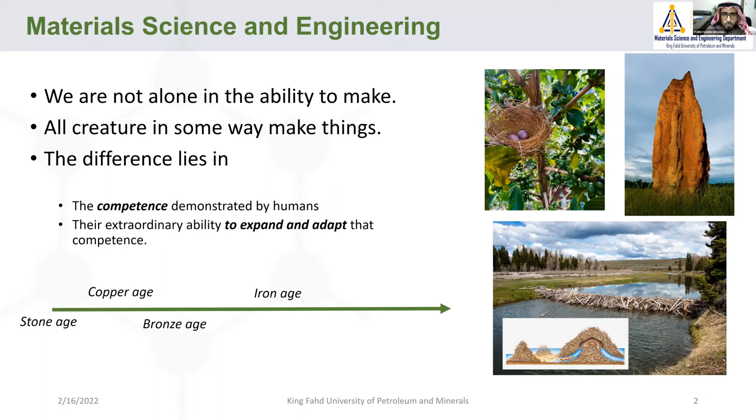And this is very important. With the advance of technology and the complexity of the technology we rely on today in our life, we have to see the holistic view when it comes to materials. We have natural resources, and those natural resources let us have a material that can be used for certain applications. So it's very important to know what different types of material exist, and then what is the problem we have, and then we want to use that material for that application.

And then after we use that material for that application and the material is already in use, then what kind of issues can that material show? How will the material behave in that application, whether it comes to failure or degradation? And then a very important question: what will we do at the end of the material's life?

Because you have high competition when it comes to material, nature cannot continue providing that kind of material. So can we recycle the material again and feed the same industry, or maybe a new industry? Think about lead acid batteries and what's going to happen to them as electrical vehicle motors become something we will see every day on the road instead of other types of cars.

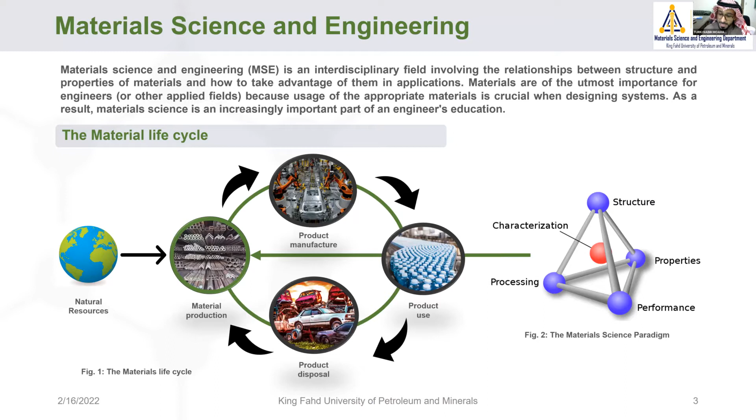So having this full picture, and having people who see this full picture and are able not only to design and understand the property and structure of materials, but also to use it for certain applications to address grand challenges—whether it comes to water, energy, or the environment that we are harming today through carbon emissions, or through recycling or the waste that we are dumping into the land. So there are many issues, and materials are always there to fix these issues.

Now, because the problem is not on a small scale, if you look at the value chain, it's not about bringing material for a certain problem or certain technology, but about developing and providing talents to the job market—people who are able to continue that effort of designing, providing, and synthesizing materials that will help in different applications.

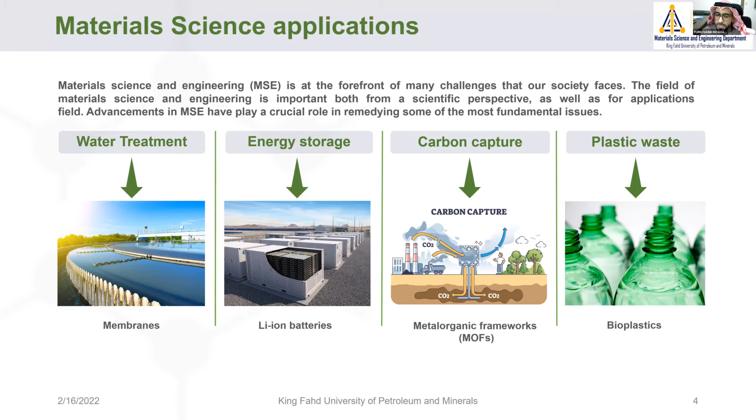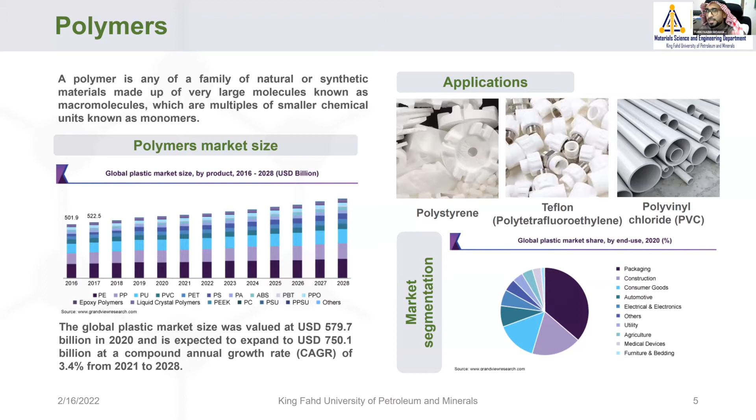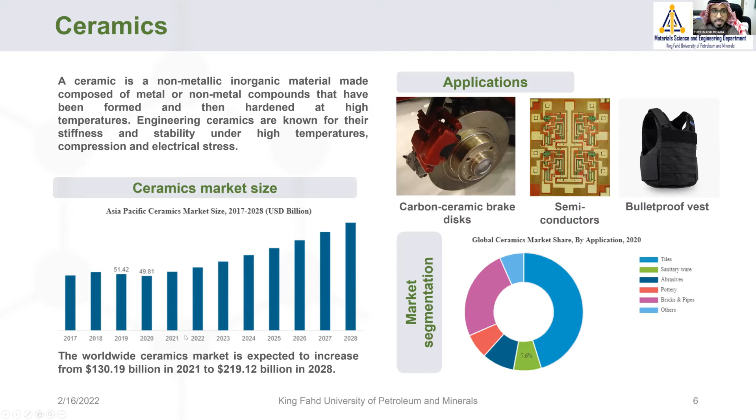This is why here at KFUPM we felt it's very important. Before that—different types of polymers, we see there is a big demand for them, regardless of what kind of plastic you're dealing with, with many applications in packaging and construction. Now if you look at ceramics, the same thing: a wide range of applications, and the global demand is also increasing. The same is true for composite materials, the topic today—you see an increase in the demand for composite material for different types of applications.

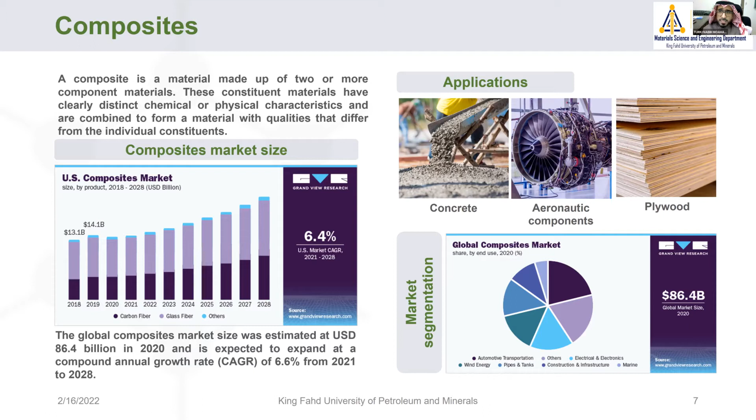This is why here at KFUPM we said it's very important that we go ahead and start something completely dedicated to material science and engineering. So in April 2021, KFUPM decided to establish the Material Science and Engineering Department. Now, this is not something unique, but what's unique is that along with the graduate program we have, we are for the first time—and this is actually the only program here in the region—providing and offering a bachelor's degree in Material Science and Engineering.

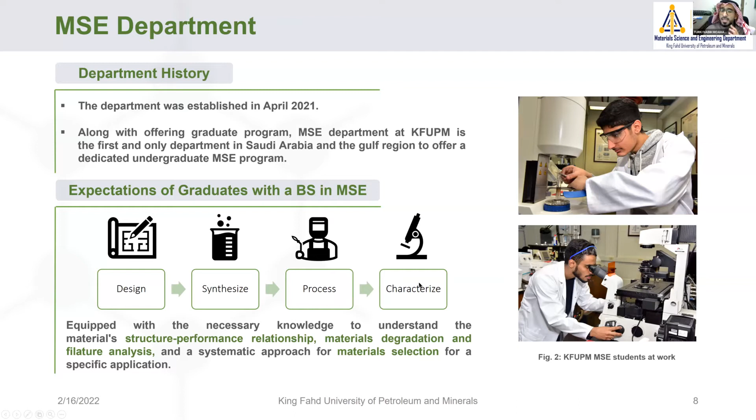So it's very important, if there is a take-home message from my talk today, that we are here trying to provide for the future jobs and for the market, for the business needs of different industries, people who are experts and ready to impact the journey when it comes to materials. So what we're expecting from our students, and what we're trying to do, is prepare students to be able to design, synthesize, process, and characterize different types of materials.

So in the first year, the student will know different types of materials, whether ceramics, metal, or composite type materials, and then thermodynamics—what encourages certain materials to behave in a certain way. So he's going to learn more about Gibbs free energy and other governing equations. And then structure, very important, and defects. The student will look at defects not as an issue, but also as an opportunity for a wide range of applications. And then diffusion and kinetics, and materials characterization.

So the student will be aware, will be introduced to a wide range of characterizing materials, such as XRD, SEM, UV-Vis, XPS - different ways of characterizing the materials.

Ending the first year, now we take the student and tell him, now we're going to give you a dedicated course in each type of material, each main class of material. So in the first year, you know about different types of materials and their structure, how to characterize them. And now in the second year, he will learn about the property-structure relationship for each main class of material.

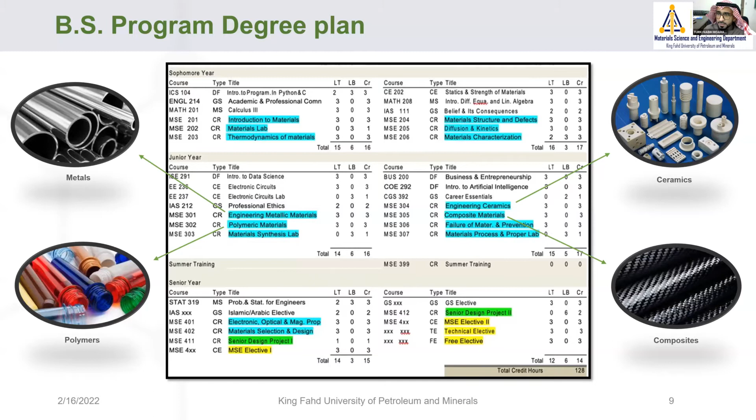And then in the final year, more dedicated courses on electronic and optical properties and material selection. And then you see here 4 elective courses, and those 4 elective courses we want to give an edge to our students before they start their next chapter in their life.

And this, as of now, we have 5 important areas: computational material design, metallurgy and mining - anyway, mining is very important for the country, that's considered to be the 3rd pillar for the economy of Saudi Arabia - materials for water and energy, corrosion and degradation, and also non-metallic material.

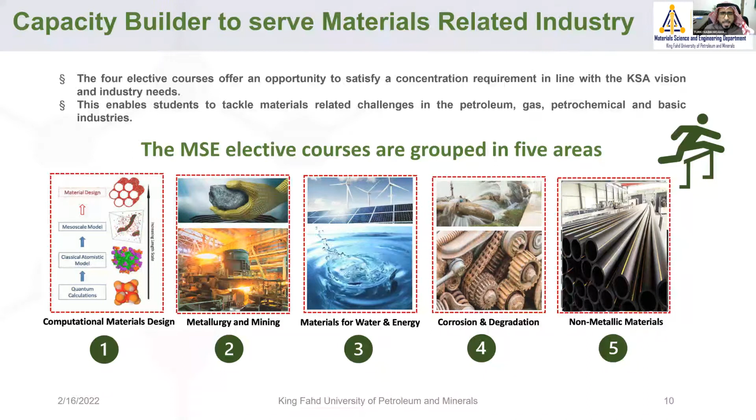We believe that it's not only delivering courses that will make a delta in the student experience. What actually makes the delta is how you can encourage them to see a problem, and then utilize their knowledge about materials to solve that problem.

And this is what we did with our undergraduate students. So we encourage them to see existing problems and to start research very early on. By the way, we told them no expectation from our side, and you shouldn't have expectation. It's only exposure - like you're exposing yourself to research and to different types of problems, and then see how we can tackle that kind of problem.

And our students, you'll be amazed - around 60% or 70% of our students have already started doing research with a researcher or faculty in a certain topic.

For example, one of the topics that we have, these 2 amazing students, Khalid and Osama, are starting to do research and developing how we can enhance or come up with a screen protector for glasses. So they get into the lab, they use advanced equipment, whether in terms of the synthesis or in terms of the characterization.

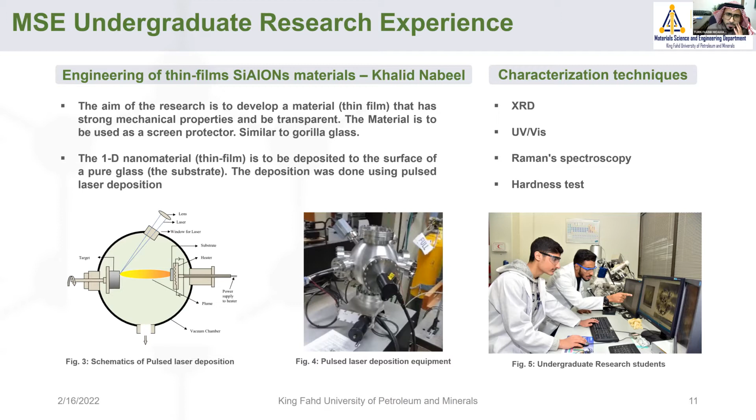Along with that, we also believe that it's not only what we do in the class, what we do with the courses and research, but also their soft skills - their social intelligence. So the students are very passionate about improving and enhancing their social intelligence.

It seems that I took more than what you gave me in the beginning, Dr. Atif, but I'm about to finish very quickly.

It doesn't mean that the excitement that you have and they share with you about the undergraduate program means we're not excited about the graduate program. We are very excited about it too.

Actually, indeed, we have around 21 graduate students working on different topics in water treatment or desalination, energy conversion and storage, environment, CO2 capture and conversion, failure and degradation, composite design, and working with amazing faculty in that field.

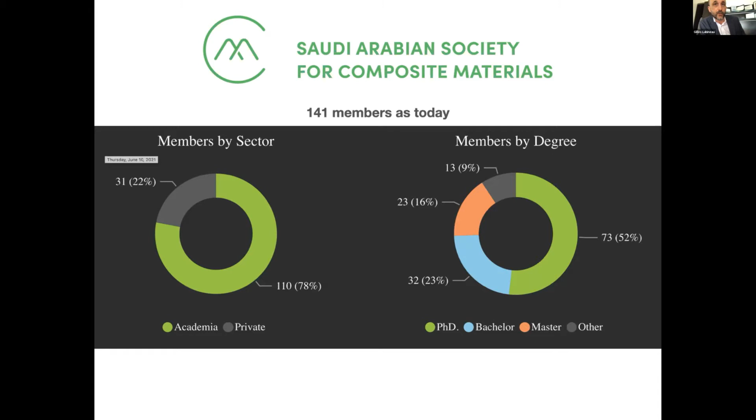You can see there is a share between academia and industry, with pretty much 75% of members from academia and 25% from industry. What is good is that you have a representation from all levels, from PhD to master to bachelor degree.

To engineering degree. So this is really a broad network, but now has an impact worldwide because we are present in a little bit more than 15 countries. This is especially due to the wide impact of Saudi students when they go for studies abroad. They get connected to the society, so we can connect their local network with our network when they want to come back to the country and so on. So this starts to have a quite very international impact.

Our objective is to link Saudi Arabia with the major academic societies when it comes to composites. That means the European one, ESCM, the American one, the American Society for Composites, and also the Asian one, the Japan Society for Composite Material.

So why join SASCOM? In one minute, what are the different activities that we offer to our members? We are trying to develop our activity along 3 lines: the first is what we call SASCOM MasterClasses, the second is SASCOM Experts, and the last is SASCOM Events.

SASCOM MasterClasses is all about education and knowledge. The point is really to provide our members a unique series of master classes on composite technologies. These are sometimes online or on-site classes that can be on generic or specialized topics about composites, very high-level classes or specific highlights, or introduction classes to composites.

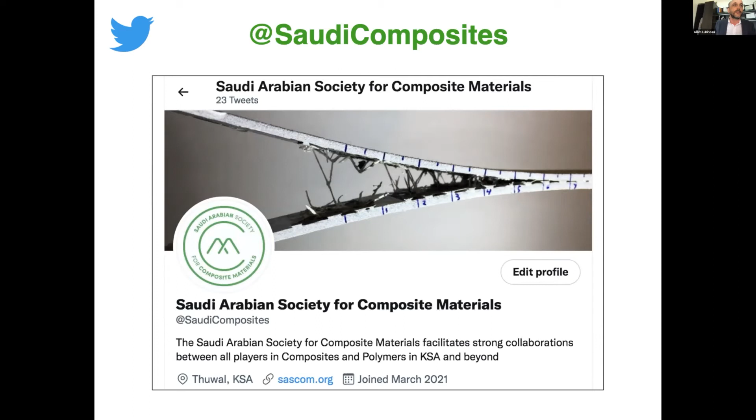You can also follow us on Twitter at Saudi Composites, where we disseminate the main information about our classes and seminars that are coming. So I think this concludes my talk.

What I want to say is that this is mainly done to open many opportunities for collaboration in many different fields, going from large volume market, packaging, civil engineering, automotive, to dedicated composite solutions for oil and gas, advanced applications in aeronautics and aerospace, robotics, composites for renewable energy, composites for smart health. So we aim to have an impact in all these fields in terms of training and research.

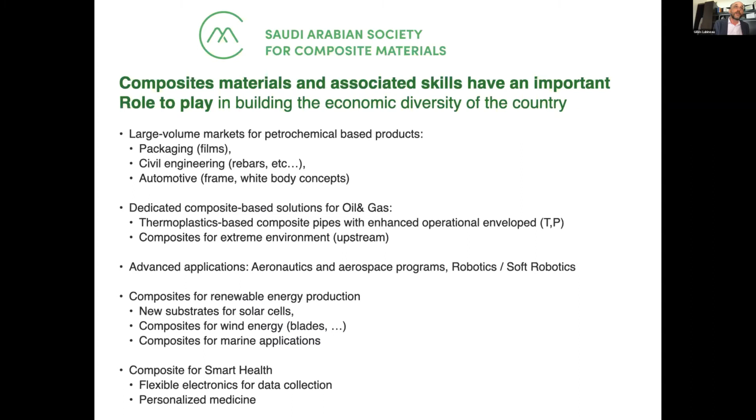Really what we want to do is federate a network of experts for training and collaboration in the GCC and beyond, and also to create something that is going to serve our members in terms of career development, job development, and networking opportunity. So I think this is concluding my talk.

So I hope that now you know more about the Saudi Arabian Society for Composite Materials, and you are all welcome to join if you want to continue this great adventure with all of us.

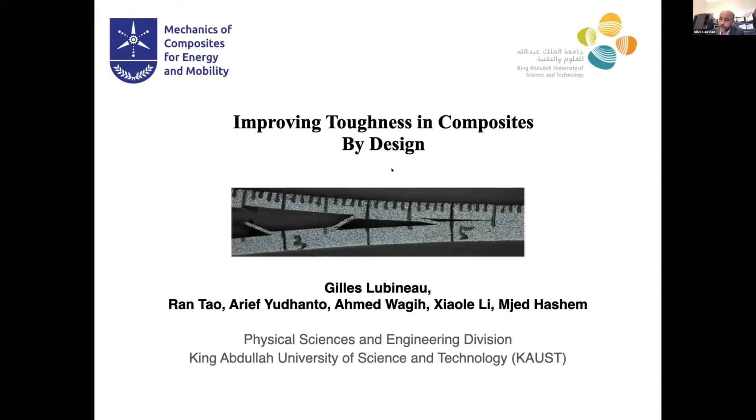So how can you tune your microstructure to increase the performance in terms of toughness and resistance to crack propagation?

This is work developed in the Labs for Mechanics of Composites for Energy and Mobility, which is actually my group at KAUST now. This is a group I'm very proud to work with — you see young, extremely motivated people.

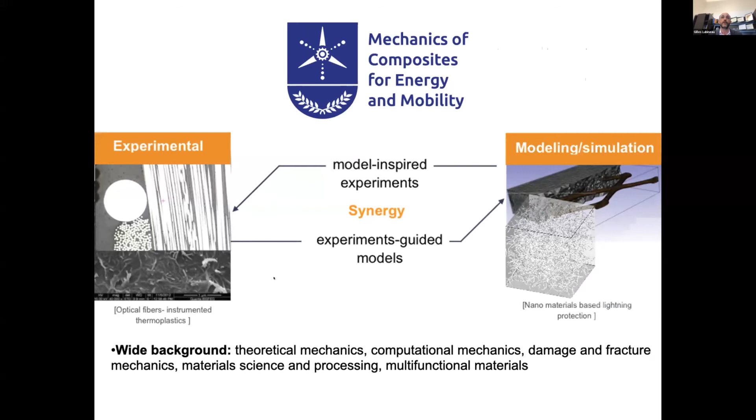What is very characteristic of the team is that we work really in between experimental mechanics and computational mechanics. If you join the team, you have 50% working experimentally and 50% in computational modeling and simulations. This diversity of background is what characterizes the team, because we publish in journals ranging from applied math, computational mechanics, and high performance computing, to more traditional composite engineering journals like Composites Science and Technology and Composite Structures, but also new concept or material science oriented journals like Soft Robotics or Advanced Materials. I think this is what defines the group's uniqueness — the ability to approach composite problems from very different angles and look at the multifunctional and multidisciplinary aspects of composites.

This specific work has mainly been done in collaboration with five people: Arief Yudhanto, Ran Tao, Ahmed Wagih, Xiaole Li, and Majed Hashem. What I will present today is mainly the result of their effort in collaboration with me.

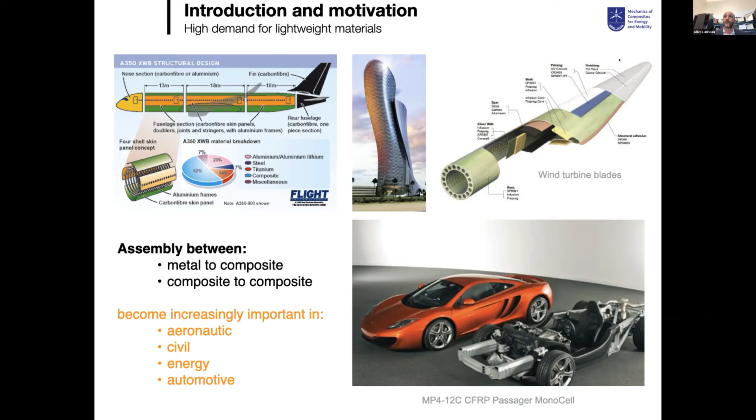What is the objective? The key objective is that bonding between different materials — metal to metal, metal to composites, or composite to composite — is becoming increasingly important in all industries: aeronautics, civil engineering, energy, wind turbines, solar energy, and automotive. If you want to assemble different composite structures together, the way it's done today relies a lot on conventional fastening technologies, meaning rivets and bolts. This introduces limitations because of stress concentration, weight increase, and poor long-term response.

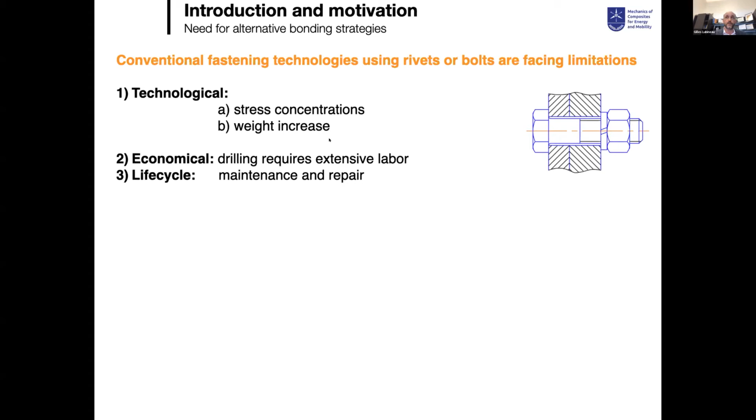So what everybody wants to do now is move to integral adhesive bonding, meaning just having an adhesive bond line between the parts. This works very well until the day it doesn't work at all anymore. Why? Because it's very difficult to inspect when you have an adhesive bond line like this. So inspection, integrity, and structural health monitoring are problems — I'll come to that in the last slide of my presentation.

What is also a problem is that these joints all fail in a brittle manner. A composite joint works very well until crack initiation occurs, followed by unstable crack propagation, and you completely lose the integrity of the application in a very short time. The performance of this kind of adhesive joint is very dependent on the surface pre-treatment, whether mechanical or chemical. The treatments that exist today on the market can be very different: mechanical treatment is very operator dependent, while chemical treatment is very demanding in terms of chemical product, with a large volume of chemical waste that will have to evolve because of health and safety regulations.

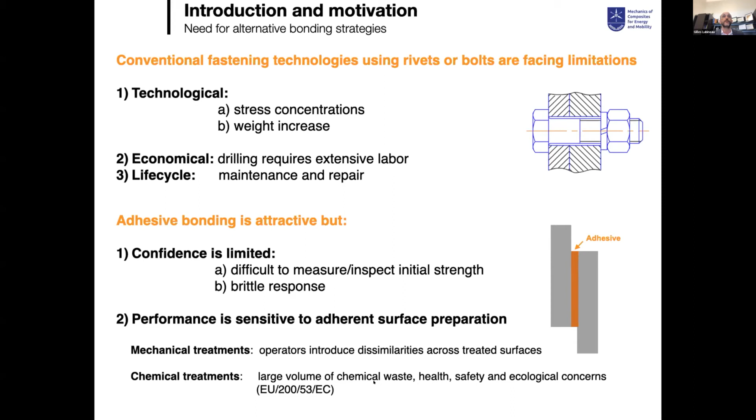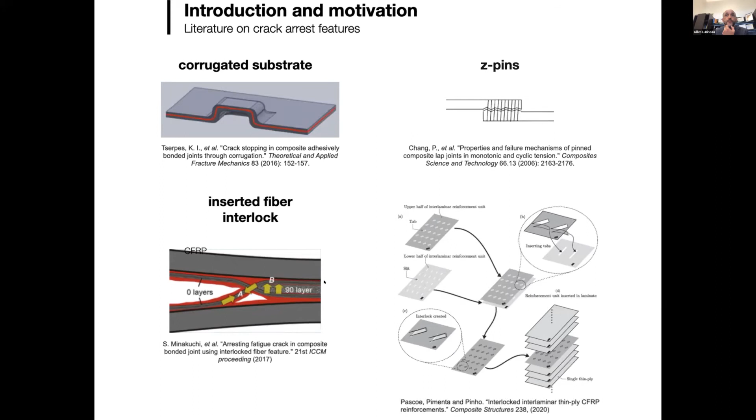All these technologies exist today, but they share a common problem: at some point, they compromise the integrity of the substrate. Whatever you are doing, you are going to toughen your joint, but you are also going to reduce the resistance and integrity of your base composite substrate. That is absolutely not what you want to do when you work in composite engineering. This is true for all the techniques you have on the market today.

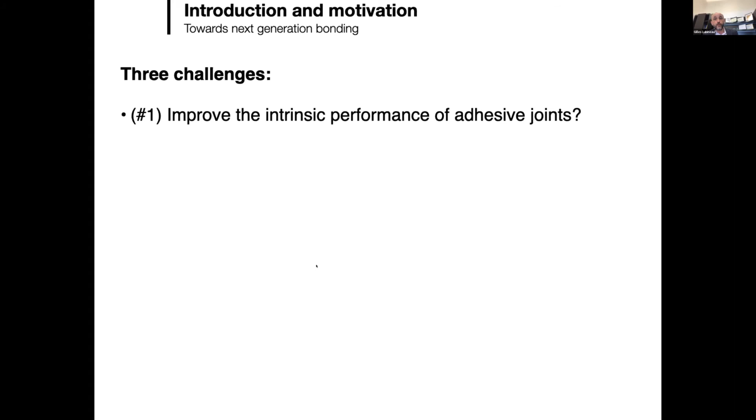From our side, we have three challenges. First, we want to improve the intrinsic performance of the adhesive joint. But more than the intrinsic property itself, what we want to improve is the mode of failure—we want to change it from brittle to progressive. What is more important is to have time for inspection and maintenance, to make sure you don't get an unstable failure every time you have a delamination propagating.

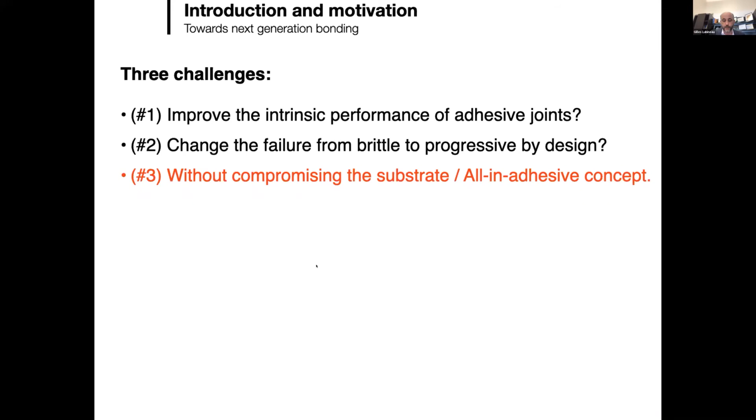And we want to do this without compromising the substrate. That means we want a technology that is what we call an all-in-adhesive concept—I will come back to this. We only modify the structure of the adhesive bond line, and based on this, we change the response of the joint, moving toward more safety in joint design.

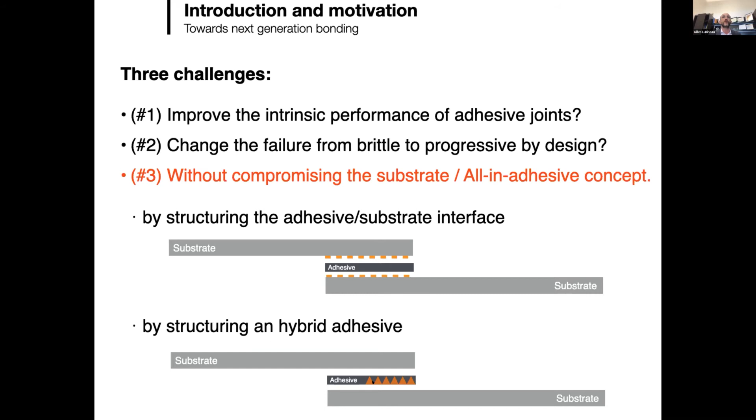I will present two concepts today. One is based on structuring. If you have two substrates, substrate 1 and substrate 2, with an adhesive bond line in between, the first technique structures the interface between the adhesive and the substrate. The second technique structures the adhesive bond line itself—the layer of resin you put between the substrates. I'll give an overview of these two techniques, among the many we develop in the lab.

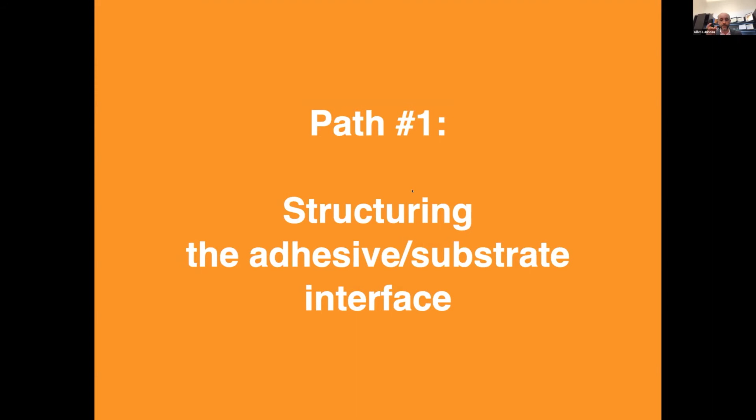So if you want a tougher joint, what can you do? The first path is structuring the interface between your composite and the bond line. If you want to engineer the surface of adhesion between your adhesive bond line and the substrate, you need a technology to pattern and modify the surface of your composite in a way that can be easily controlled. The way we do this is by laser treatment.

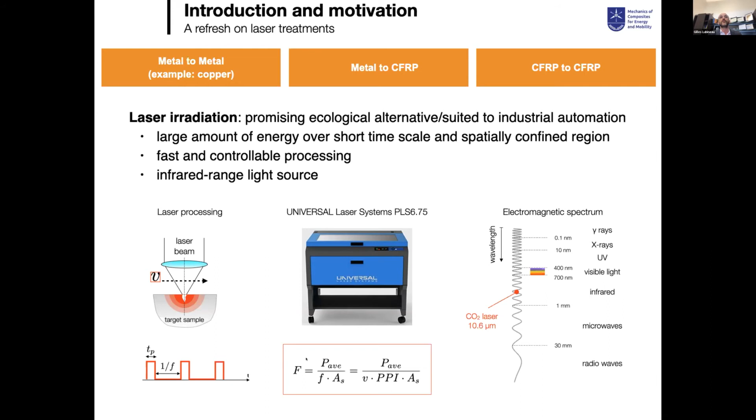Just a very quick note about laser treatment: you irradiate the surface with a certain frequency, and the efficiency of your laser treatment depends on what you call the fluence—essentially the quantity of energy per unit surface area that you inject onto the surface. What's important to understand is that depending on the fluence you use, you get very different results.

What's important to understand is that using laser, you can relatively easily control a pattern in terms of the chemical properties of the surface, its functionalization, and in terms of the morphology and geometry of the surface. So you can really use your laser as a way to introduce patterns.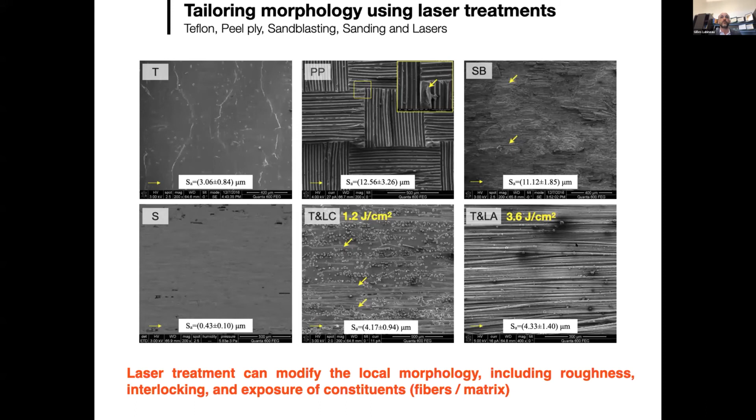Why is introducing patterns important? Because you can run a very simple numerical study at the beginning to understand the effect of heterogeneities on the propagation of cracks during delamination. Let's start with a very simple example that you can all run yourselves.

You take a DCB beam like this, made of two substrates, with the adhesive bond line as the yellow layer here. This bond line is connected by two green interfaces—the interfaces between the bond line and the substrate. Imagine this interface is heterogeneous: you can have weak properties, meaning weak toughness and weak strength, for the light green areas, or strong properties, strong toughness and strong strength, for the small inclusions here.

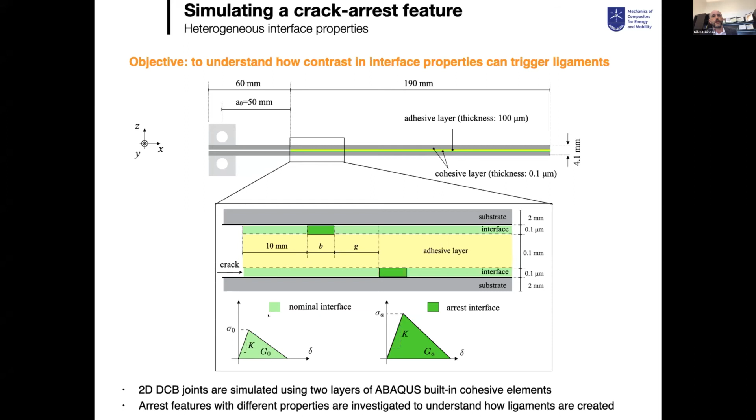Now you wonder what happens to a crack that is propagating through this interface in case there are some heterogeneous properties like this. What you will see is that you can face very different configurations depending on the relative value of the dark green and the light green.

The first situation is that your crack is going to propagate through the interface without anything special. It will go through the weak area and then through the strong area, and your crack will propagate. This is a very classical DCB propagation, so you expect to see a load displacement curve like this, a P delta curve. For those who already did some DCB delamination, you recognize a classical DCB.

The only thing you can see is that when you go across the local reinforcement here with stronger properties, locally you have an improvement of the delamination curve, and you switch from the low toughness to the high toughness, but you don't get more than the performance of your superior surface treatment.

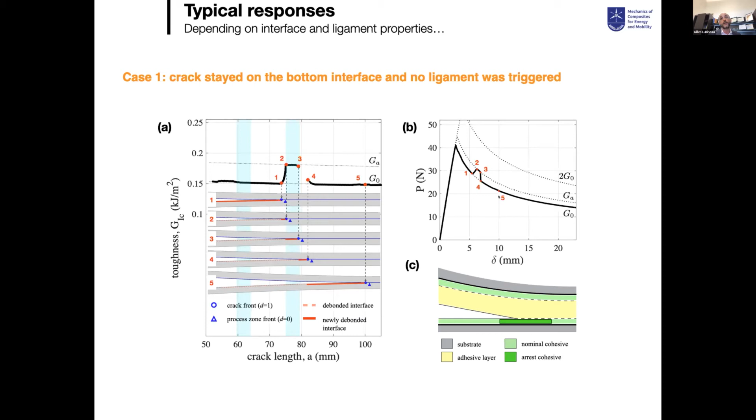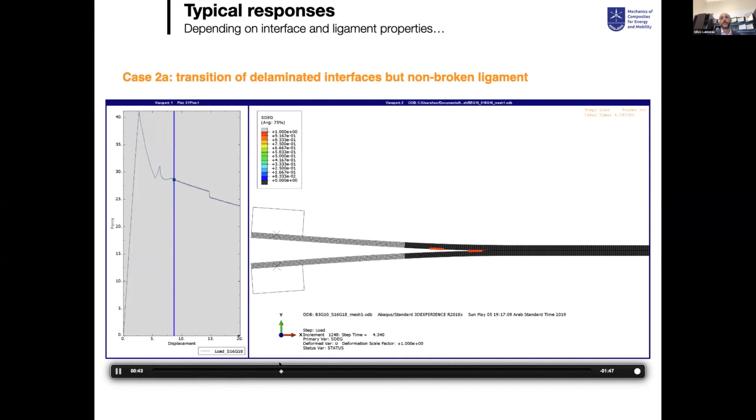Now what is interesting is that when you start to play with the contrast, you start to introduce what you call bifurcation. That means your crack is propagating at the bottom, and then at some point the crack gets pinned due to the contrast in properties, and you initiate a secondary crack at the top. That means you are able to initiate a ligament, and your adhesive bond line will create a ligament between the bottom substrate and the top substrate.

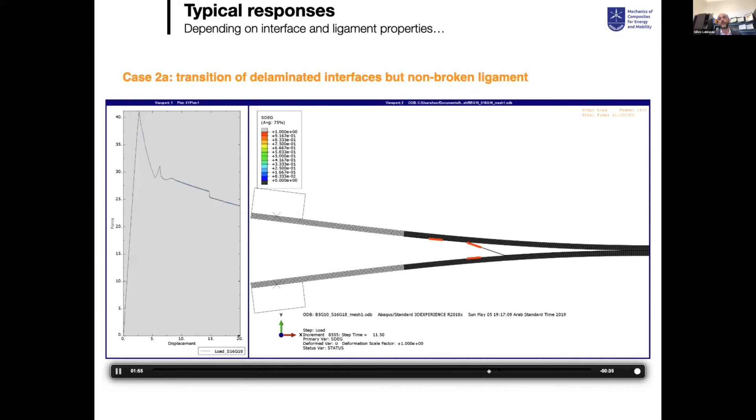So here you start to see the path towards engineering the microstructure and controlling the response to crack propagation of your interface. Of course, this mode of delamination depends on how much your ligament is going to survive, and you have a third mode of failure.

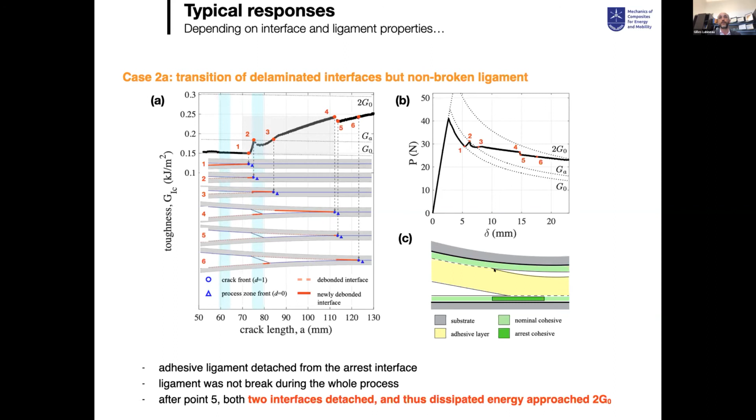That is a situation where you start to initiate the ligament, you start to have a local reinforcement, a local increase of the toughness as a function of the crack extension. So toughness is increasing, and then you break your ligament and come back to the initial properties.

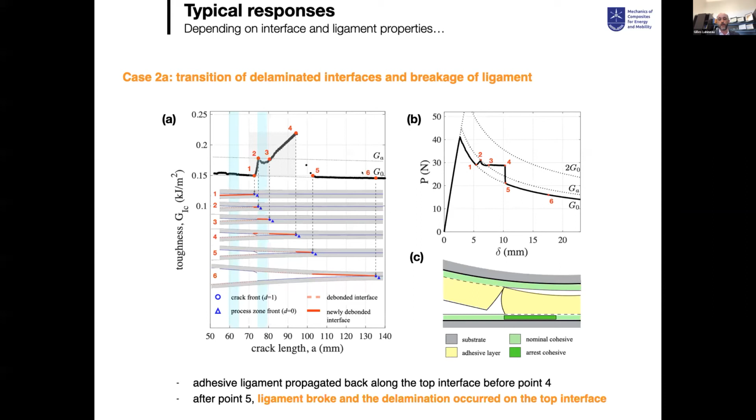So what you want to do to design something like this is really to play between these three schemes of degradation and to be able to control this one. That means to be able to control the development of ligaments that are going to create a tougher joint, to increase the property of your joint.

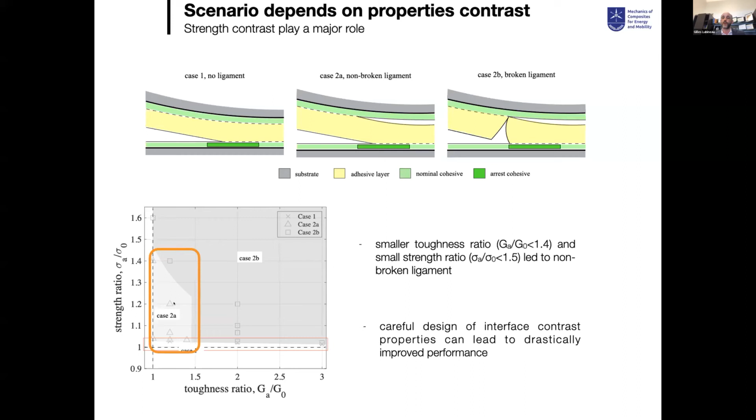What you realize when you make simulations on this is that you can completely predict this by numerical simulation. You have a design space that tells you that if you have a certain ratio in strength and a certain ratio in toughness between these two domains, you have a certain window here for design where you can control for sure that you're going to create ligaments that introduce this toughening effect.

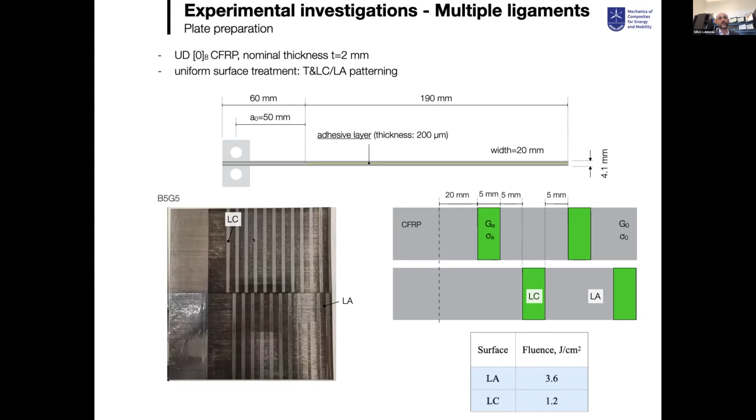This is something you can verify experimentally. Here you take two composite plates and make a kind of pattern laser treatment like this. You recognize the different pattern I was showing before, with alternating properties of strong and weak, strong and weak, strong and weak.

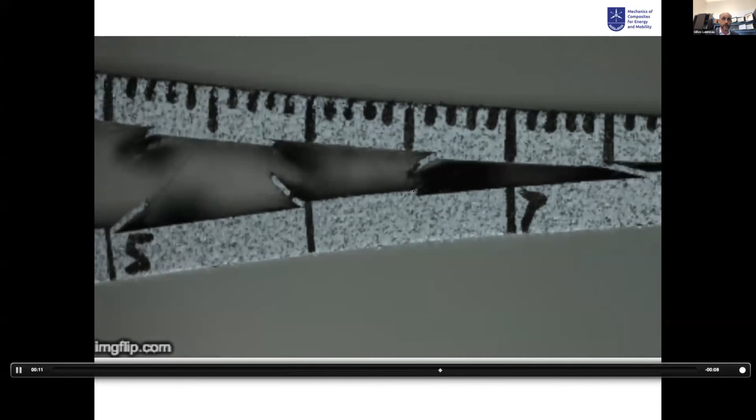What you see during the delamination now is something like this. Instead of a very simple macro crack of DCB delamination, you start to see the creation of a family of ligament bridging like this, and this is something you control by design. If you look at this, it's really beautiful because you have plenty of dissipative events along your bond line just by modifying the surface treatment you put on your composite beforehand.

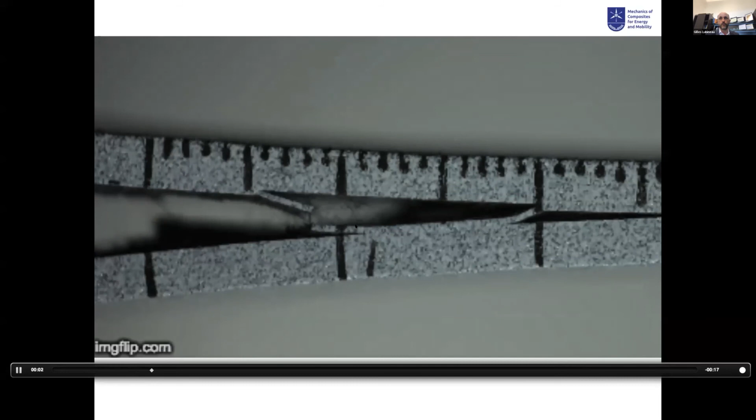And in terms of properties, if you look at the effective properties now, your P delta curve is going to look something like this. You can see that the toughness, the one you measure from a macroscopic point of view, is multiplied by 3 or 4.

That means you increase the performance of your structure by 300 to 400% without changing your material. You just change the way you architecture the material. And you have really huge improvement to get from such technology.

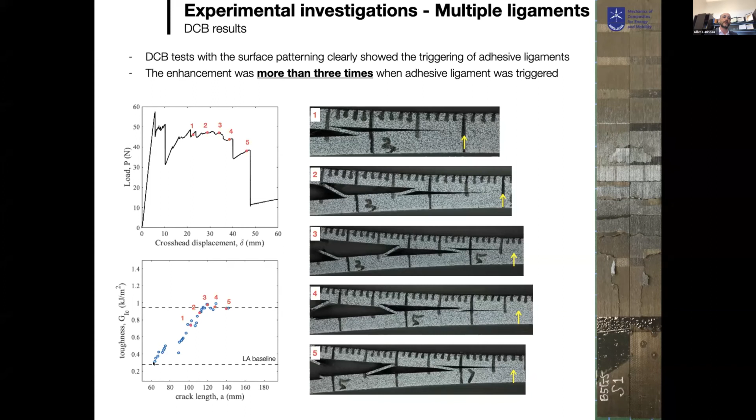You see here the increase of the R curve between the baseline, that means what you get without any patterning, and what you get when you are designing this pattern. So this is the first thing I wanted to share with you. It's something that has been demonstrated in mode 1 and mode 2.

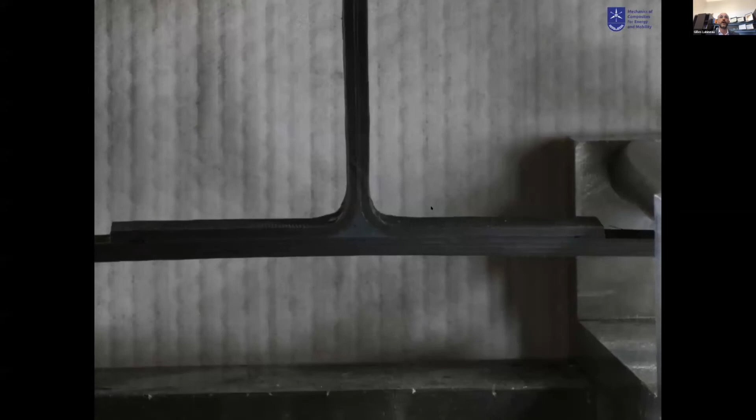You can see on a small structure like this, a T-joint reinforcement, that if you make a surface treatment like this at the interface, you create ligaments during the failure of these T-joints, which are usually stiffeners used for composite structures. Based on this, you see the load extension curve, that means the force displacement curve you get from the pristine structure.

If you start to introduce this kind of treatment, without modifying the composite at all, you directly get an improvement by a factor of 3 to 4. So this is really huge in terms of improvement.

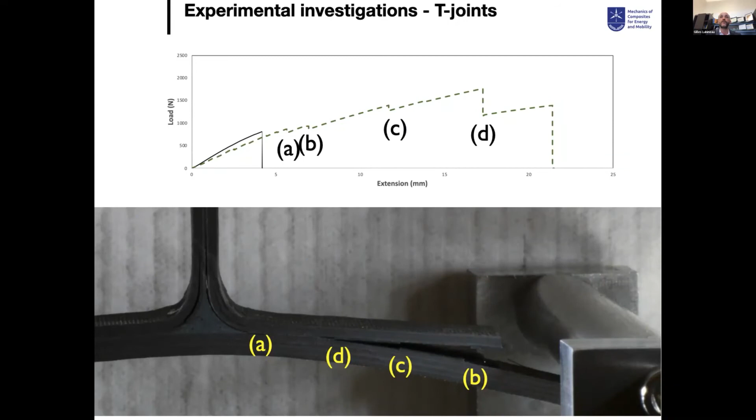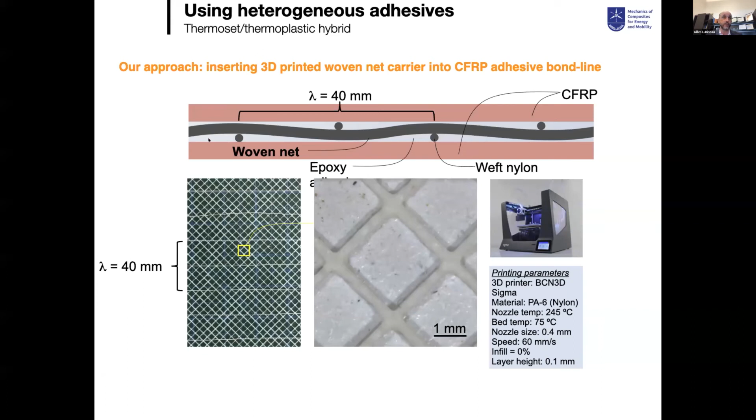There is a second technique that we developed, which is structuring the adhesive itself. Structuring the adhesive for us is based on making sure that the adhesive layer that is going to break will dissipate as much energy as possible during the delamination. And we do this by introducing a hybrid adhesive bond line between the substrates, meaning we introduce thermoset and thermoplastic composites together.

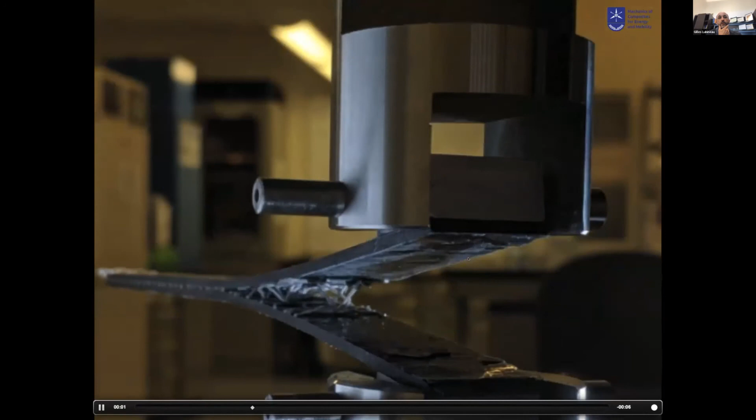If you engineer this completely correctly, what you get in terms of delamination is something that looks like this. That means if you engineer it properly, you give enough freedom to the thermoplastic to stretch, expand, and dissipate energy during the delamination.

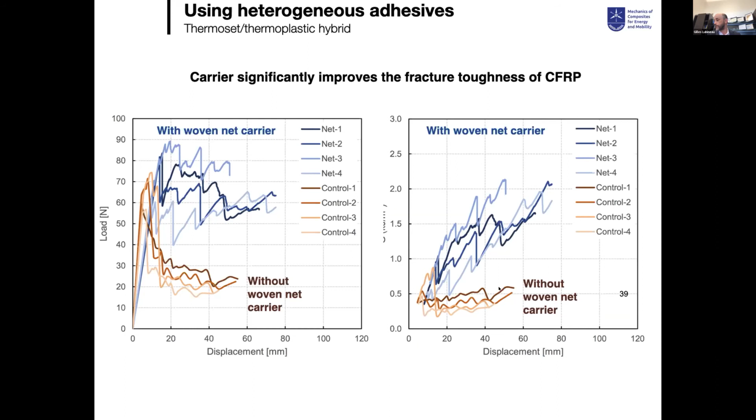I don't want to insist too much on these things because we could discuss this for a long time, but I want to keep time. I still have 4 minutes, so I will go to the conclusion.

What I wanted to show you, what I wanted you to be convinced of, is that you can manipulate the performance of your composites the way you want, and especially manipulate the R curve just by modifying the microstructure in a better way. So here I showed you two paths.

The first one is the introduction of heterogeneities on the adhesive substrate interface. The second one is the introduction of additive heterogeneities in the adhesive bond line.

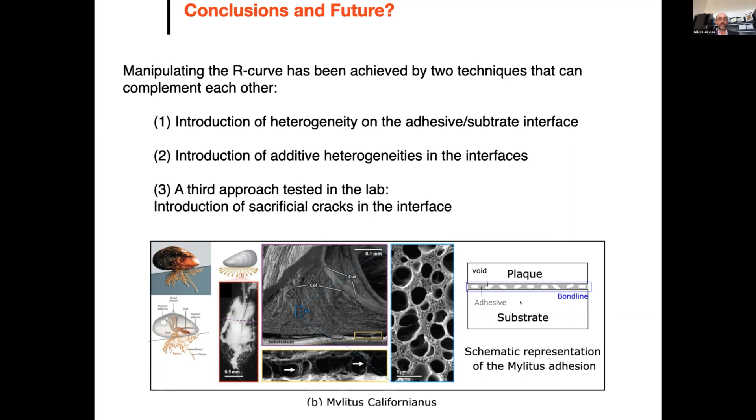There is a third approach that we are testing now, which is actually more of a biomimetic approach, in which we introduce sacrificial cracks in the interface. This is inspired more from biological adhesion systems, where when you look at the adhesive bond line of very adhesive systems, you have a lot of micro voids that are there to promote the dissipation of energy, and thereby increase the effective toughness of the system.

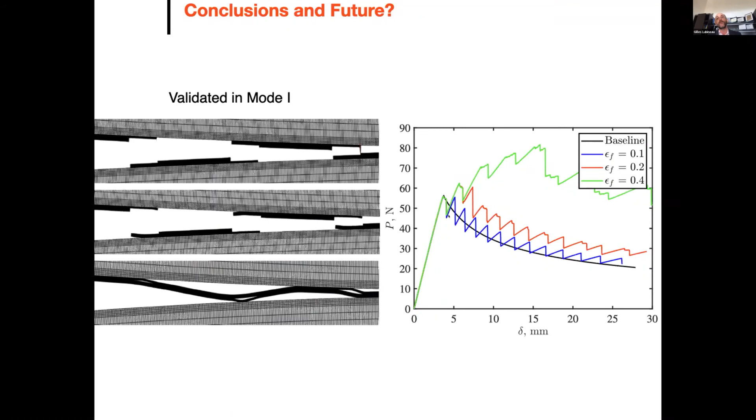This is something that we do in the lab by introducing sacrificial cracks in the adhesive bond line. And here again, you have an additional step of performance gain, because you can create multiple fragmentation inside the adhesive bond line by doing these kinds of things. This is a third promising path.

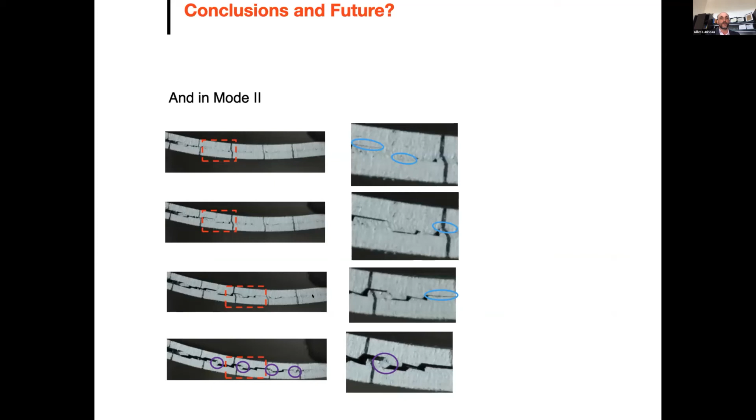What is important is that all the technologies I have shown today, 1, 2, and 3, are all compatible with what I call an all-adhesive concept. That means we don't touch the substrate. Everything comes in an engineered tape with different modifications: thermoplastic inclusion, patterning of the interface, and introduction of sacrificial cracks. So what we are doing now is creating this product, integrating these three points of understanding together to make sure we can deliver super high performance tape for adhesive bonding of adhesive joints.

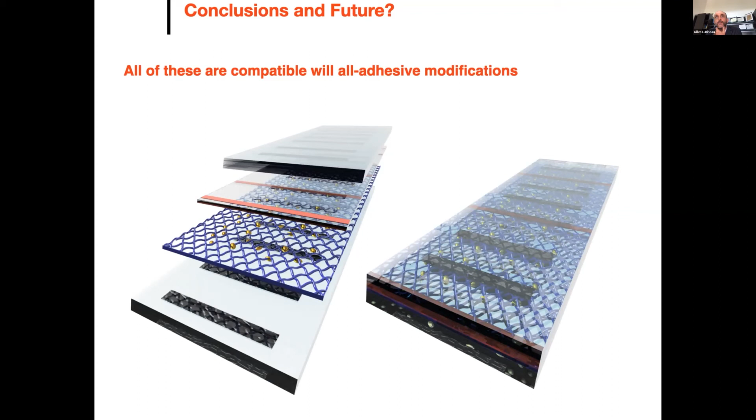So this is what we are closing now. What is the next step for us?

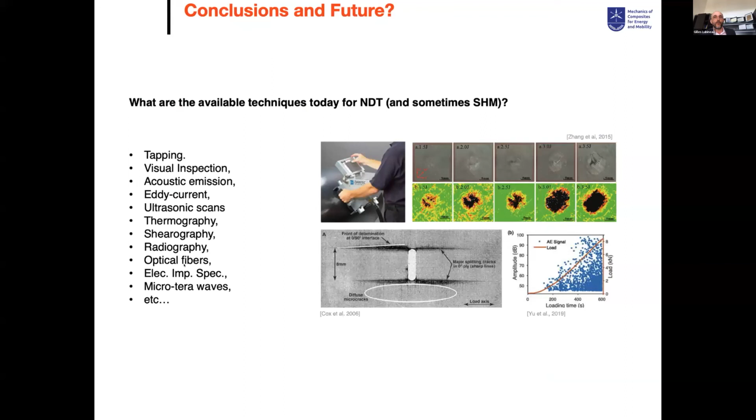The next step for us in the team is really to work and solve the bottleneck I was mentioning at the beginning: monitoring of these structures. Structural health monitoring is always a nightmare for composite structures, and nobody really knows how to do this today. There are techniques available on the market, but most cannot be used in situ or in real time. So what we develop in the lab is a completely disruptive technology that makes these joints and composite structures multifunctional, so they can be interrogated in a wireless manner.

We have new technology based on inductive sensing, which we've already patented and are expanding to different types of composites. This is really a challenge for us: making sure that composites are going to be multifunctional enough to be interrogated in a wireless fashion, so you can control them easily.

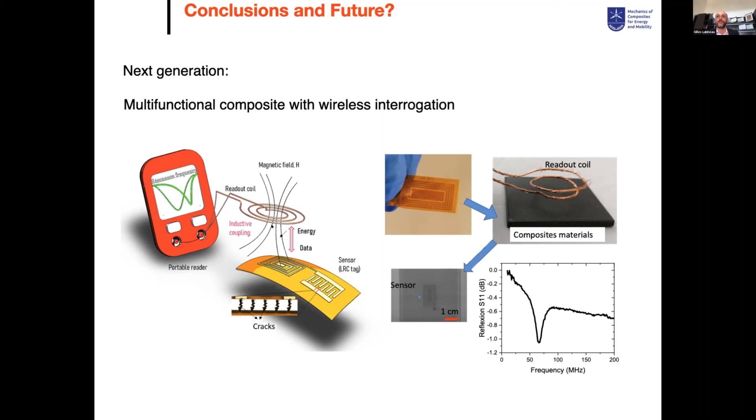For easy composite integration, this is a couple of papers we did around this topic. If you are interested to follow up on this work, you are very welcome to write me an email: gilles.lubineau@kaust.edu.sa. This is the web page for our group, or the Twitter for our group.

And then, of course, I insist again about the Saudi Arabian Society for Composite Materials. All the activities we are doing here, we plan to promote and develop collaborations, and we are very open about collaboration on these topics, either directly with the team or through SASCOM. This is really the point, so I think this concludes my talk.

I am exactly at 20 minutes, so Professor Atif, I give you back the floor.

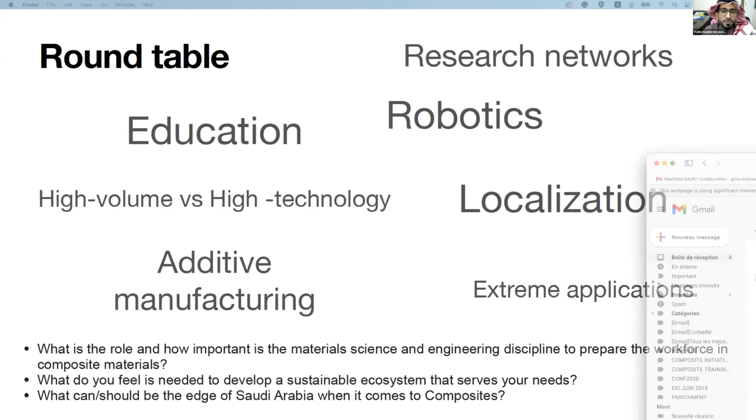What is your message to our students who decided to major in material science and engineering? They're very passionate about materials. Thirty seconds, a brief message and also a final thought on this. Let's start with the message to them, because I think all of them maybe with us today, and I think they are still early in their program, and I think would love to hear something from you.